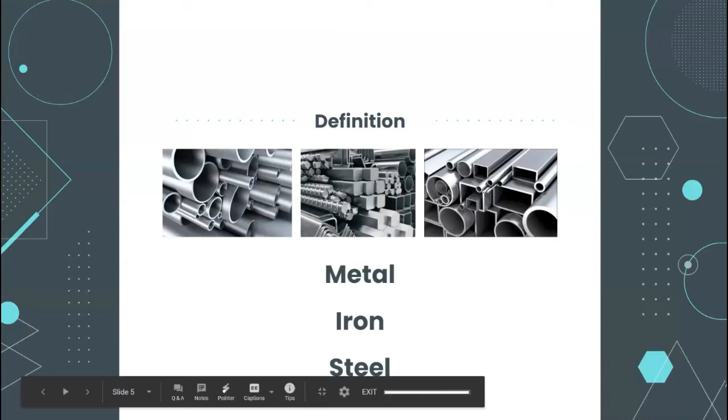First of all, introduction to metal, iron and steel. The definition of metal: any class of elementary substances such as gold, silver or copper, all of which are crystalline when solid and many

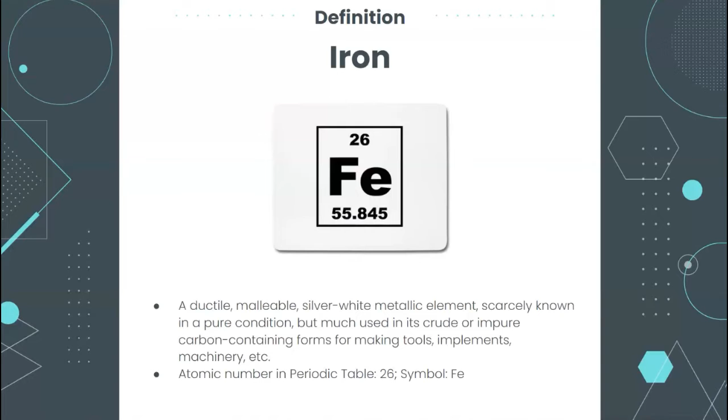of which are characterized by opacity, ductility, conductivity and a unique luster when freshly fractured. Iron is a ductile, malleable, silver-white metallic element scarcely known in a pure condition but much used in a crude or impure carbon-containing form for making tools, implements, machinery, etc. The atomic number for iron is 26 and the symbol is Fe.

The definition of steel is any of various modified forms of iron artificially produced, having a carbon content less than that of pig iron and more than wrought iron, having qualities of hardness, elasticity and strength varying according to composition and heat treatment.

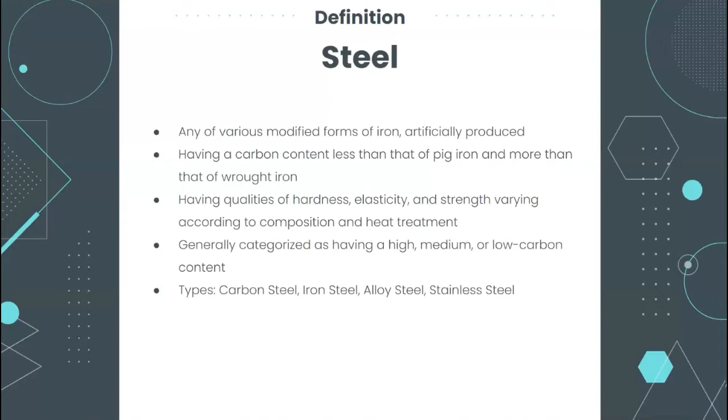There are various types of steel. First one is carbon steel. It looks grey, matte-like and is considered vulnerable to corrosion.

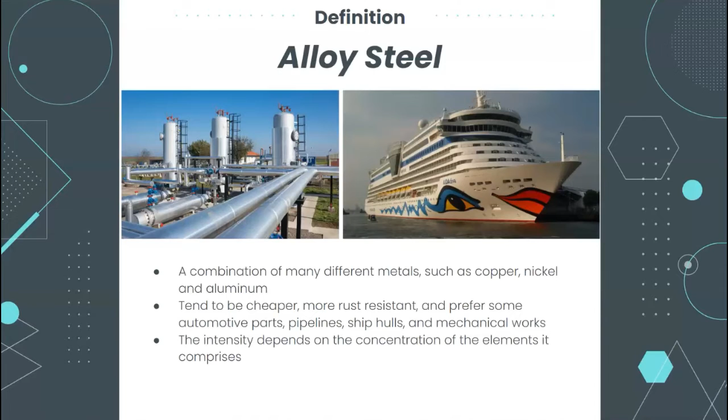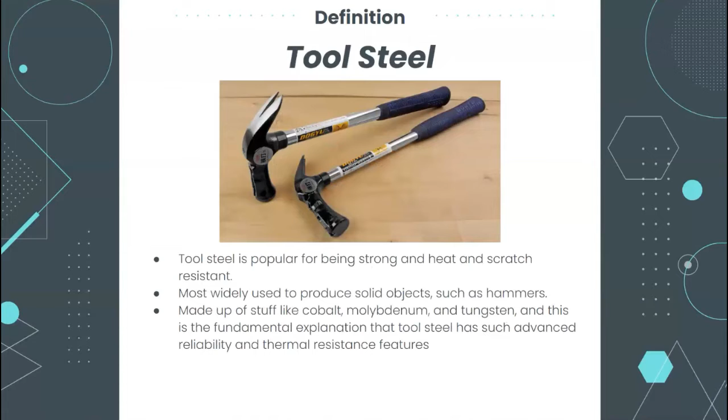Alloy steel is a combination of many different metals such as copper, nickel and aluminium. Tool steel is popular for being strong and heat and scratch resistant. It is most widely used to produce solid objects such as hammers.

Stainless steel is glossy and usually has around 10 to 20 percent chromium, which is the main alloy material. This mix allows the steel to be rust resistant and quite readily molded into different shapes.

This is the difference between steel and iron. Iron is a pure element, but steel is an alloy where iron is the main component. Iron gets oxidized easily to form rust and the shine does not last long, but steel is protected from getting rust. Thus, the shine lasts longer.

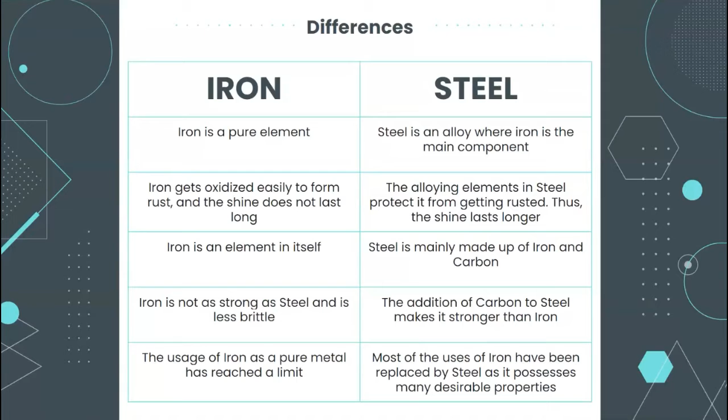Iron is an element in itself, while steel is mainly made up of iron and carbon. Iron is not as strong as steel and is less brittle, but the addition of carbon to steel makes it stronger than iron. The usage of pure iron metal has reached a limit, but most of the uses of iron have been replaced by steel as it possesses many desirable properties.

My name is Maisarah and I will be talking about Ironmongery. Ironmongery is a mass production of goods made from iron, and ironmongery work is quite similar to the jobs of blacksmiths.

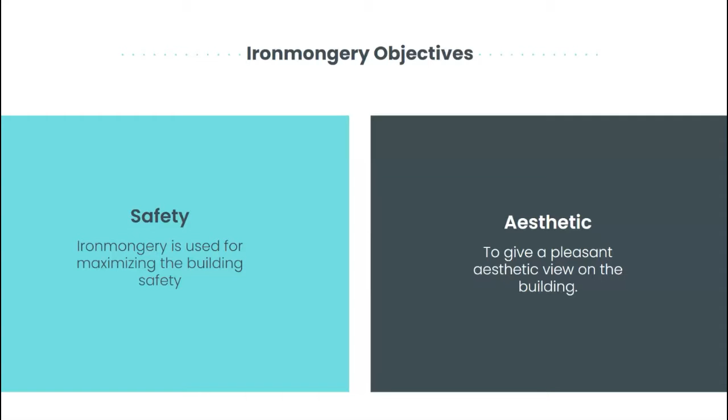Ironmongery is important and is used for the safety of the building and also for aesthetics, to give a pleasant view for the building. This is the type of ironmongery found at the door, both external and internal doors. The main ironmongery of the door is the lock set, hinge and door handles.

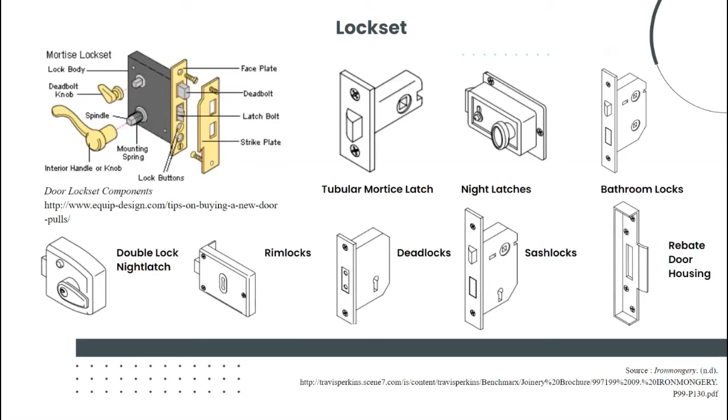Next one is the night latch. It is used for multi-residential buildings and does not require key access. Others include the double lock night latch, rim locks, deadlocks, sash lock, and rebate doors.

The next topic is the type of door handles that have different purposes for different rooms. Latch handles are commonly used for internal use where they join with the tubular mortise latch, and for bathrooms where the outside face can be unlocked for safety, and for locks which have pre-cut holes.

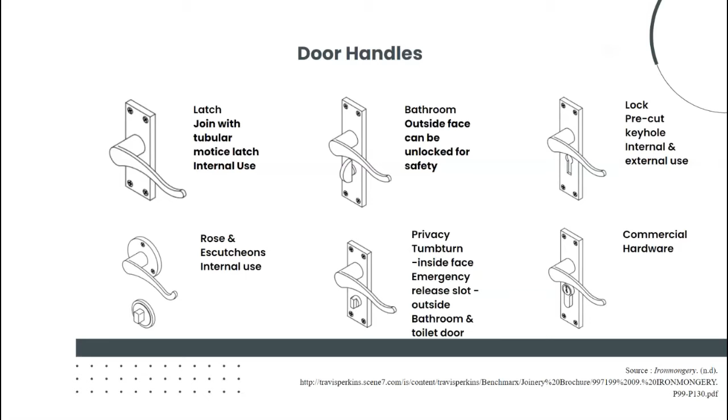Next is the rose and escutcheons for internal use. Then the privacy door handle, which has an emergency release slot used for bathrooms and toilets. Lastly, there are commercial hardware door handles.

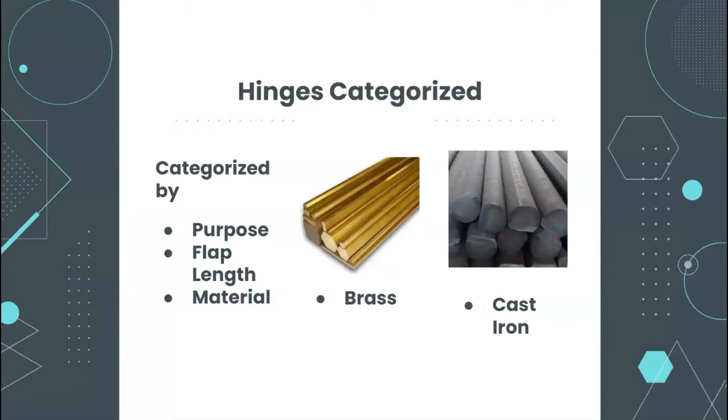Next, we go on with the hinge, which helps the door to open and close. Hinges attach the door, pivoting at one edge. The hinge is categorized by purpose, flap length, and materials. These are the types of materials commonly used for hinges, which are brass and cast iron.

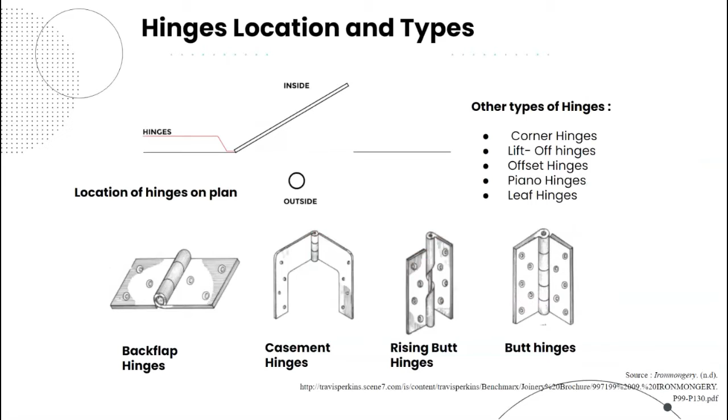This slide shows the location of the hinge and the common hinges that are used, such as the back flap hinge, casement hinge, rising butt hinge, and butt hinge.

So next, my friend will be explaining about Metalworks on the next slide.

Metalworks is actually widely used in the building and construction sector because of their intrinsic properties. Metals are solid materials that are hard, shiny, malleable, fusible, ductile, and have good electrical and thermal conductivity in general.

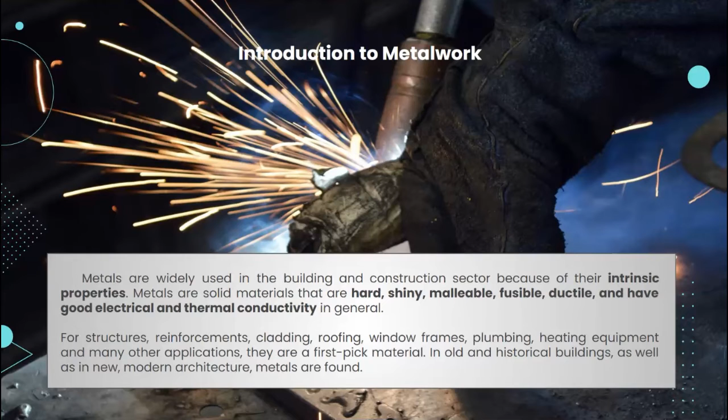There are two types of metalwork: ferrous metal and non-ferrous metal. Ferrous metal's base metal is iron, which generally makes them susceptible to rust when exposed to humidity. Alloy steel, carbon steel, cast iron, and wrought iron are some common ferrous metals.

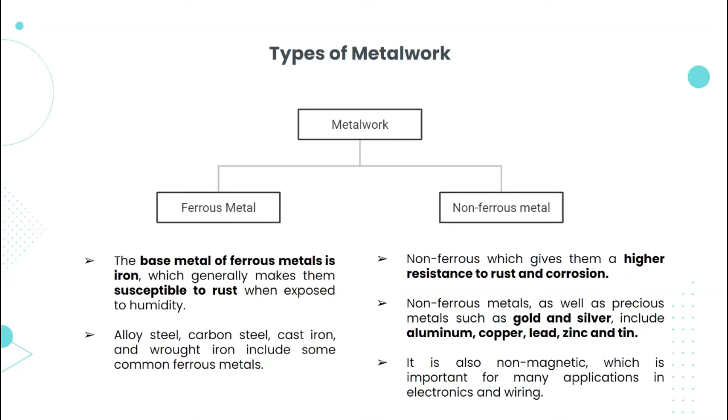Non-ferrous metals have a higher resistance to rust and corrosion, as well as precious metals such as gold and silver, including aluminum, copper, lead, zinc, and tin. They are also non-magnetic, which is important for many applications in electronics and wiring.

For stainless steel, it has a high content of chromium that forms an invisible layer on the steel surface to prevent it from staining. When stainless steel is prepared with the addition of chromium, nickel, nitrogen, and molybdenum, it becomes corrosion resistant.

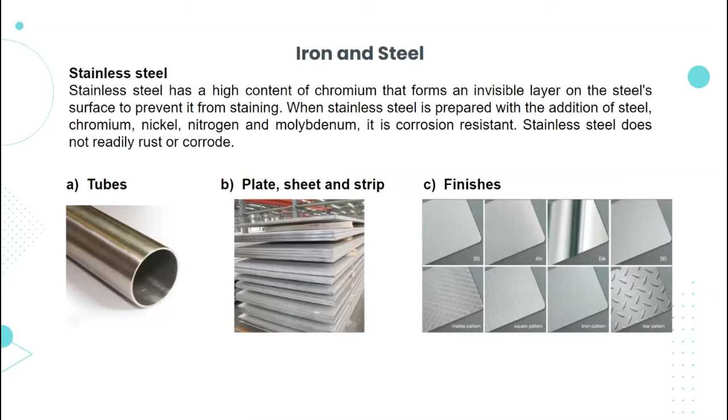Stainless steel does not readily rust or corrode. These are examples of stainless steel.

For galvanizing, steel requires a zinc coating to be applied. It also requires the steel to go through a series of other processes to ensure that without any foreign bodies getting in the way, the zinc will completely adhere to the iron in the steel. The zinc then fuses into the steel and creates a durable coating that does not peel or flake, making it possible to convert the finished galvanized steel into a product completely protected from corrosion.

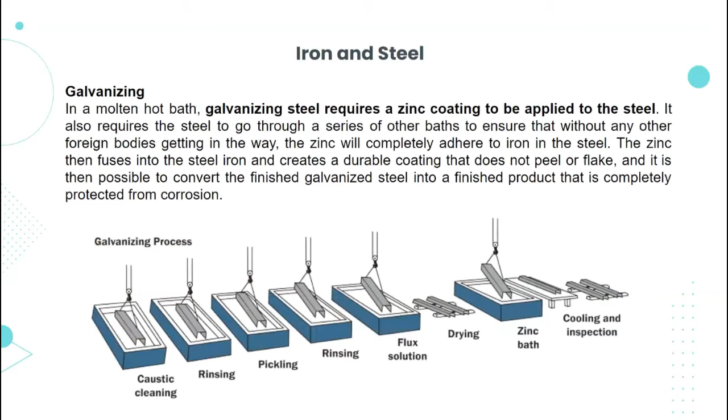So basically, these are the galvanizing process steps. As for sherardizing, the process involves heating the steel up to a very high temperature. It is then placed in a rotating drum that also contains zinc dust and possibly some other sand filler. The steel is then rolled at a high temperature in a drum full of zinc, where the zinc will evaporate and diffuse, bonding to the steel and filling in very small crevices.

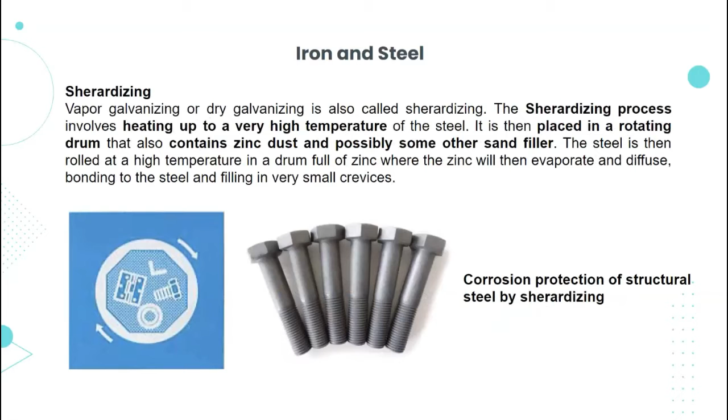As for chromium plating, chromium plating is a method of applying a thin layer of chromium through an electroplating procedure to a substrate.

There are two types of metal fasteners: those that produce a permanent bond and those that require either a releasable or a sliding bond. Examples in the first category include screws, nuts and bolts, rivets, retaining rings, and clamps. Non-permanent fasteners include quick-release couplers and clamps designed to be removed at a specified time, and pins allowing the relative movement of the fastened parts.

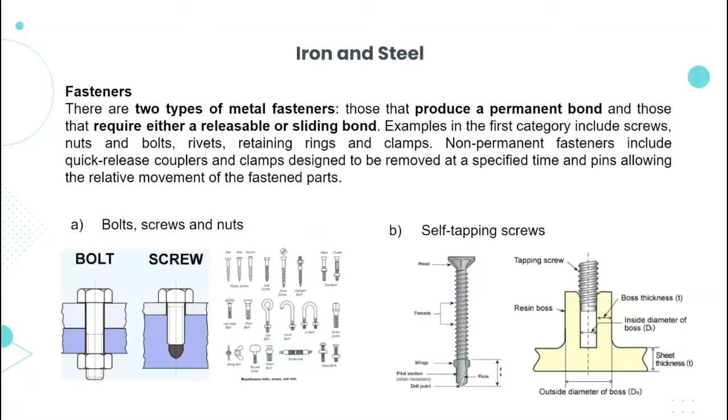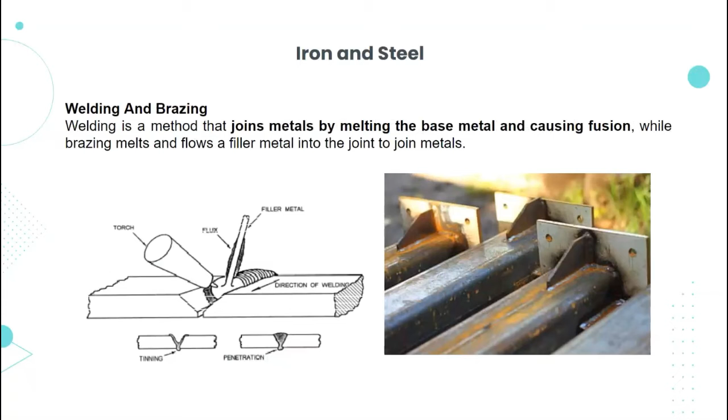Welding and brazing: welding is a method that joins metals by melting the base metal and causing fusion, while brazing flows a filler metal into the joint to join metals.

For aluminum works, after steel, aluminum is the second most used metal in buildings. Aluminum can be formed into many shapes and profiles due to its ductility. For exterior construction, aluminum wall cladding systems are commonly used, with large wall panels requiring fewer joints, resulting in time-efficient installation. Some common applications for aluminum are long-span roof systems, unstable places such as towers for electrical transmission, corrosive or humid environments, and structures to which maintenance access is restricted, such as mast lighting towers and antenna towers.

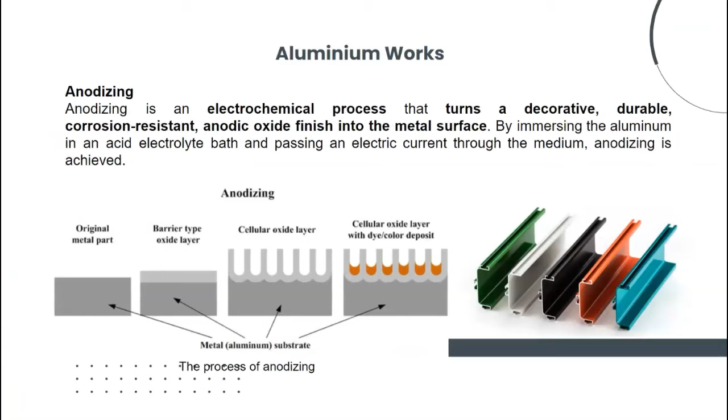Anodizing is an electrochemical process that turns a decorative, durable, corrosion-resistant anodic oxide finish into the metal surface. By immersing the aluminum in an acid electrolyte bath and passing an electric current through the medium, anodizing is achieved.

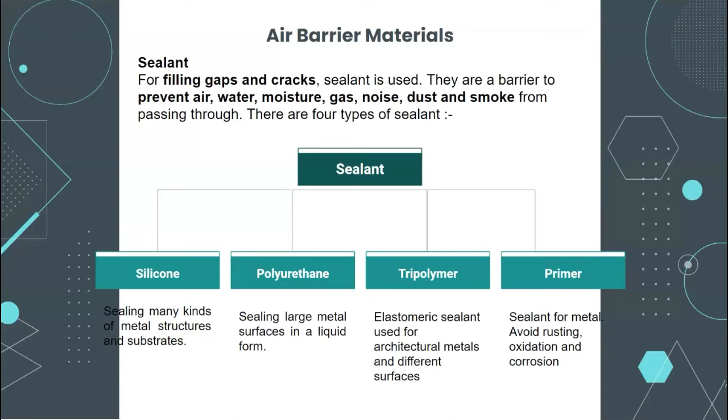As for the sealant, it is used for filling gaps and cracks. They are applied to prevent air, water, moisture, gas, noise, dust, and smoke from passing through. There are 4 types of sealant: silicone, polyurethane, tripolymer, and primer.

Weather stripping is used to block air leakage around doors and the operable parts of windows. Some types of weather stripping are closed cell foam, rib, tubular, spring vinyl, spring metal, magnetic strip, door sweep, full threshold, and spring loaded.

My name is Mohamad Safwan and I will be explaining about structural steelwork.

So what is structural steelwork? Structural steelwork is generally used to form a skeleton frame of a building or other built asset, typically consisting of columns and beams which are riveted, bolted or welded together.

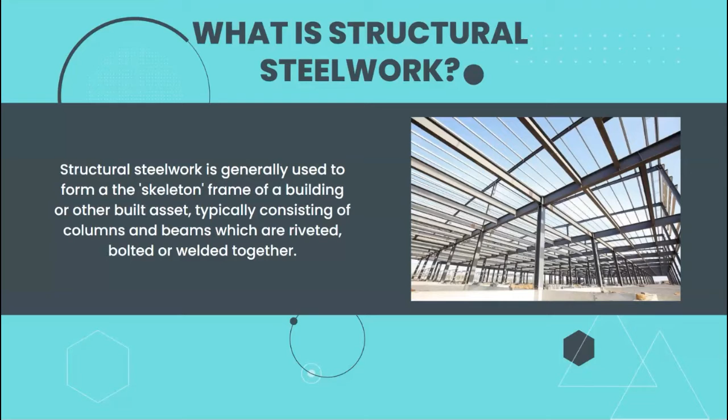The next one is the material of structural steelwork, which is shaped into several sections: I section, also known as a universal beam, H section, universal column, circular hollow section, rectangular hollow section, and many other shapes.

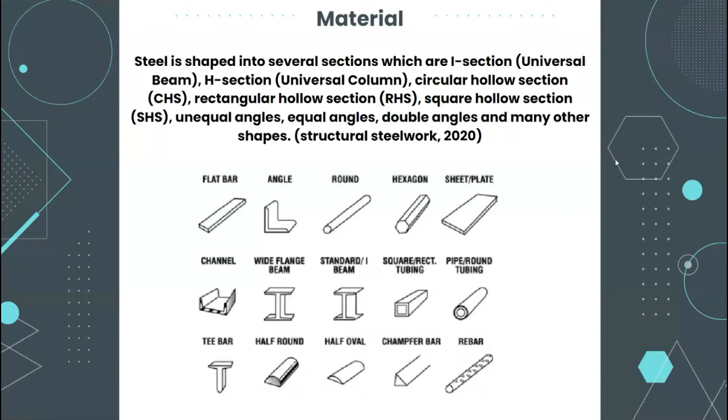They have two types of standard section: hot roll steel and cold roll steel. Hot roll steel is formed by moving the heated steel between white rollers, which deform it into an appropriate shape such as H, I, W, S, C, angle, cylinder, and so on. For the cold roll steel, it is pressed at a slightly cooler temperature, even at room temperature, which ensures that it does not shrink or change shape.

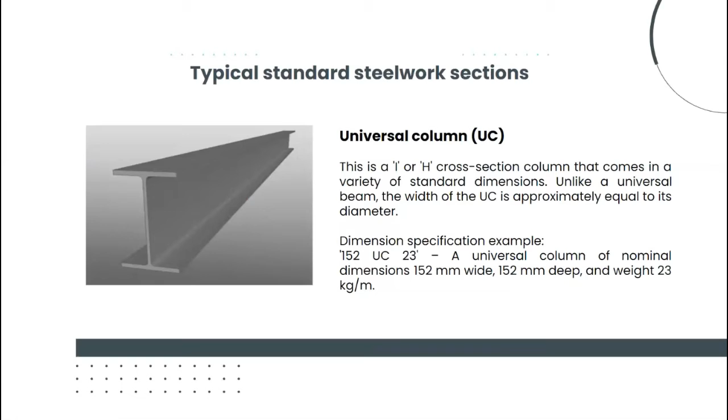So the next one is the typical standard steelwork sections. The first one is a universal column, which is an I or H cross-section column that comes in a variety of standard dimensions. The next one is a universal beam.

Flat section, where a connection between two beams is needed. Flat section can be used when welded along the beam top or bottom length. They may add tremendous power.

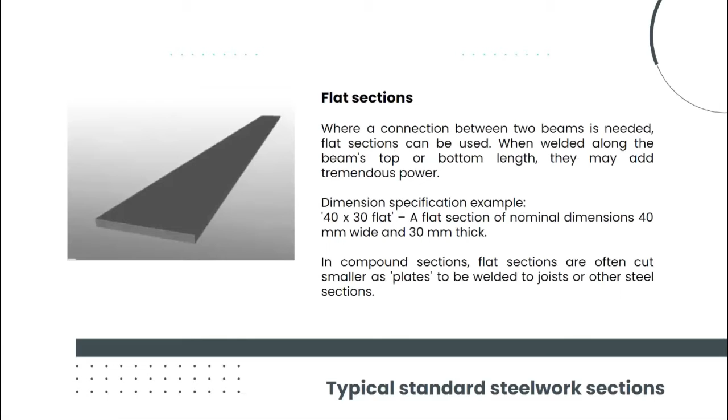So the next one is the circular hollow section, also known as a CHS section. They are also used as column braces for a steel frame structure. They are marked with a diameter and thickness of the wall.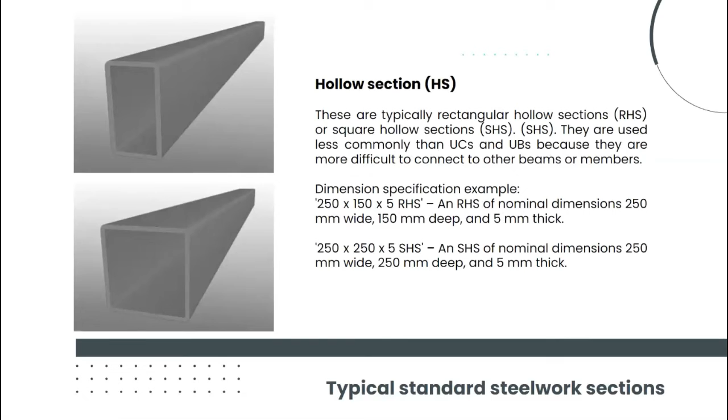The hollow section is typically a rectangular hollow section or square hollow section. They are used less commonly than UC section and UB section because they are more difficult to connect to other beams or members.

The next one is a rolled steel angle, RSA. They can be either equal angles or unequal angles, often called L-shaped sections. They have two types of angle: equal angle and unequal angle.

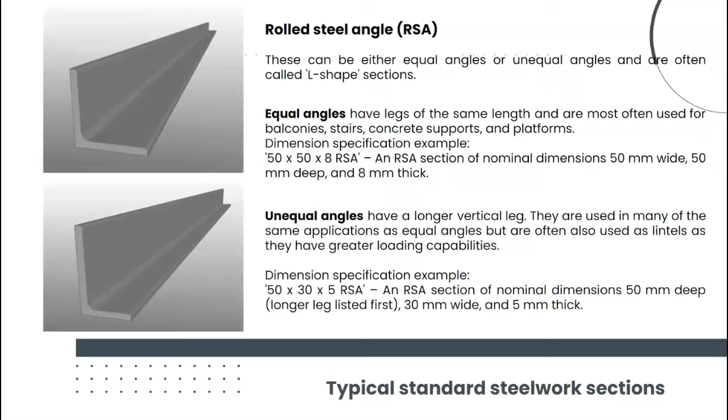This is the dimension and tolerance based on specification for structural steelwork of JKR. So all steel must be specifically inspected in accordance with the required material quality standard. The measurement and tolerance shall comply with the applicable specification as shown in table A and steel grade as shown in table B. This is a quality standard for structural steelwork JKR.

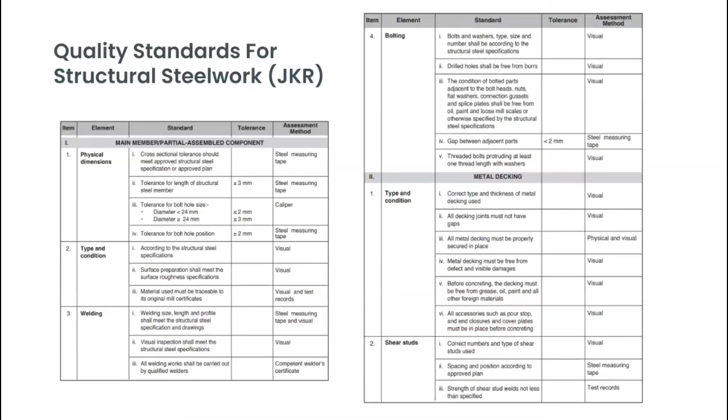So the next one is welding. It's a process where two metal parts may be connected together, through brazing and welding. The application of high temperature and often the inclusion of other metal or gases allows the metallic components of two pieces to combine and become one.

They have a range of various welding techniques: the first one is spot welding, metal inert gas, tungsten inert gas, arc welding, and gas welding.

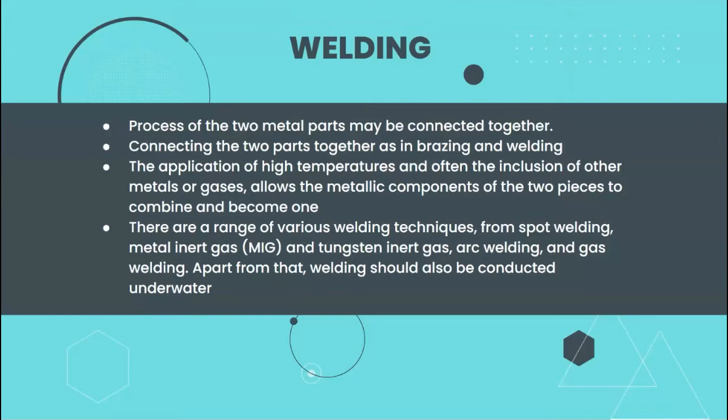So for the welding process, the first one is gas metal arc welding, which uses shielding gas around the electrode wire that heats up the metal to be connected together. The next process is tungsten arc gas welding, used for welding thick sections of stainless steel or non-ferrous metal. The shielded arc metal welding is a stick process requiring power current to create an arc between the stick. The last one is flux cored arc welding, which is a semi-automatic arc welding.

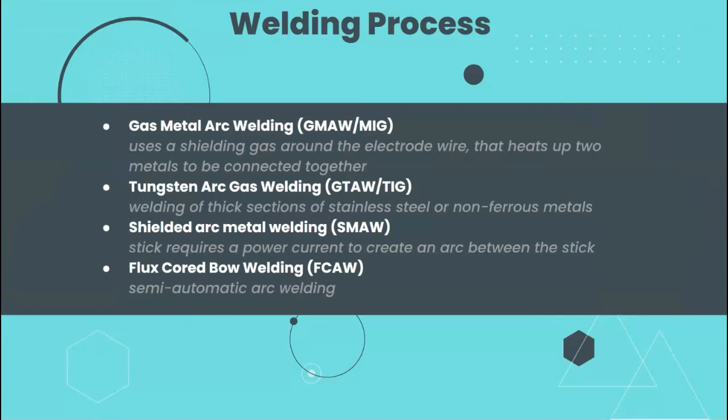The next one is bolting. The word bolt is typically used for a fastener that has only part of its shaft threaded. A fastener with its whole shaft threaded is typically called a screw. The unthreaded part of the shaft of the bolt is called the shank.

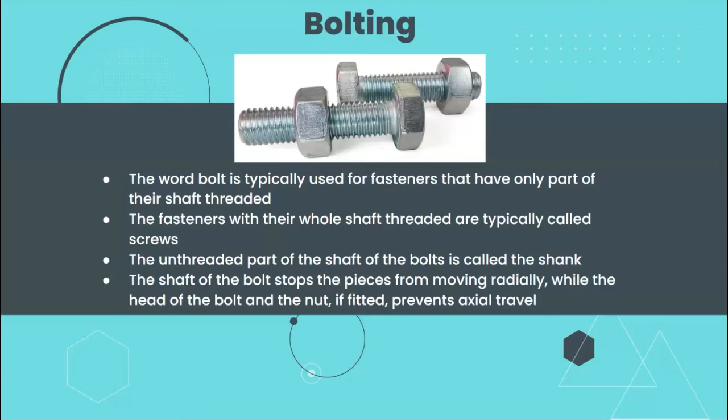The shaft of the bolt stops the pieces from moving radially, while the head of the bolt and nut, if fitted, prevent axial travel.

The combination of bolt and nut shall be not less than the following: 4.6 bolt with grade 4 nuts, 8.8 bolt with grade 8 nuts, and 10.9 bolt with grade 12 nut. Based on this, all bolt assemblies that are seized as tightened shall be replaced.

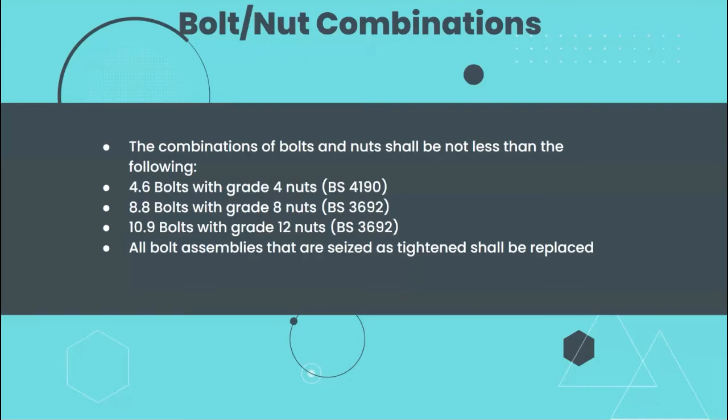The length of the bolt shall be selected such that after tightening, at least one thread plus the thread run-out should be noticeable between the nut and the threaded part of the bolt, and at least one clear thread should be evident above the nut.

Washer: when the members are attached to a finished surface treatment which may be affected by a spinning nut or bolt head, the washer should be positioned under the rotating portion.

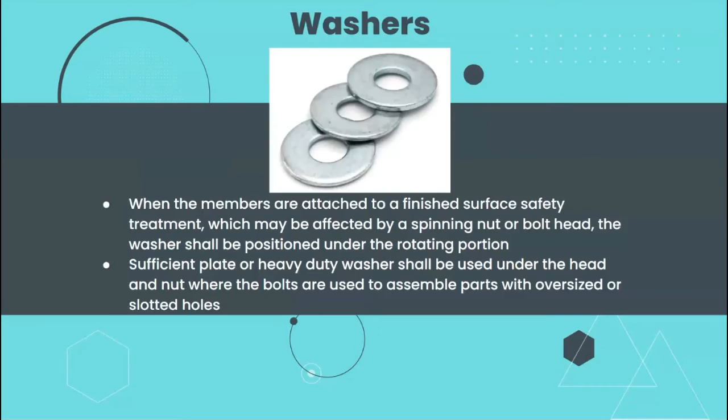Galvanized nut: nuts should be tested after they have been galvanized, for free running on the bolt, and retapped as necessary to ensure adequate tightening performance.

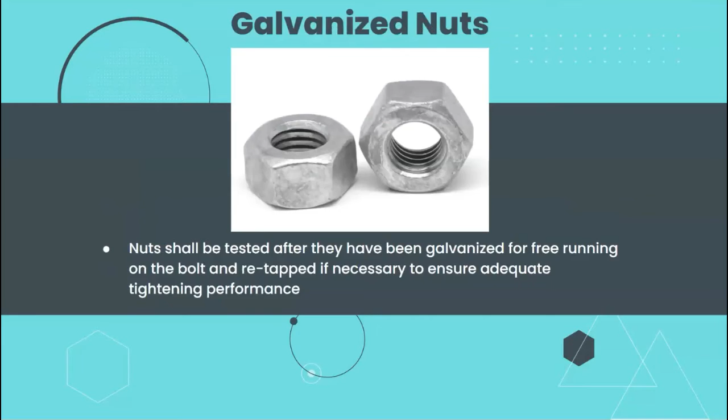For the fitted bolt, a precision bolt to BS 3692 is used as a fitting bolt where the holes are reamed after assembly so that the hole clearance is no more than 0.3 millimeters.

Accuracy of fabrication: all the steelwork needs to be manufactured to an accuracy to allow erection to take place without adding permanent erection stresses into the structure, according to the unique tolerances. The structural fabrication can be carried out in shops or at the construction site.

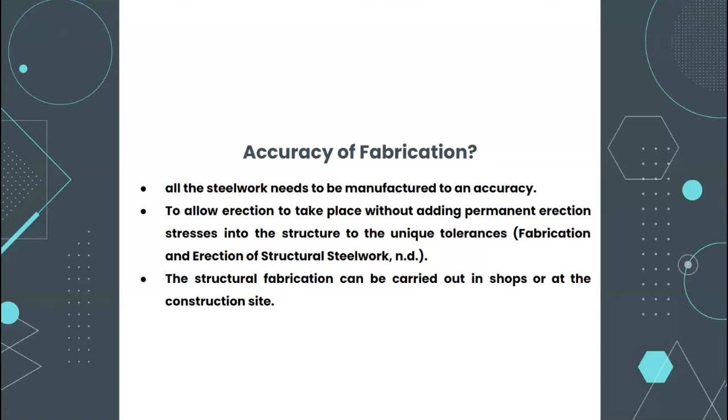These are the procedures of fabrication. The first one is surface cleaning. There are three ways to clean: hand preparation, blast cleaning, and flame cleaning.

The second one is cutting and machining, which starts with cropping or shearing using hydraulic shears. Sections can be cut to length or width.

The third one is punching and drilling, forming holes for structural steelwork connections by using numerically controlled tools to simultaneously drill holes.

The fourth one is straightening, bending, and rolling. Due to the cooling process, the laminated steel may get distorted. Therefore, this method is applied using rolls or gag presses.

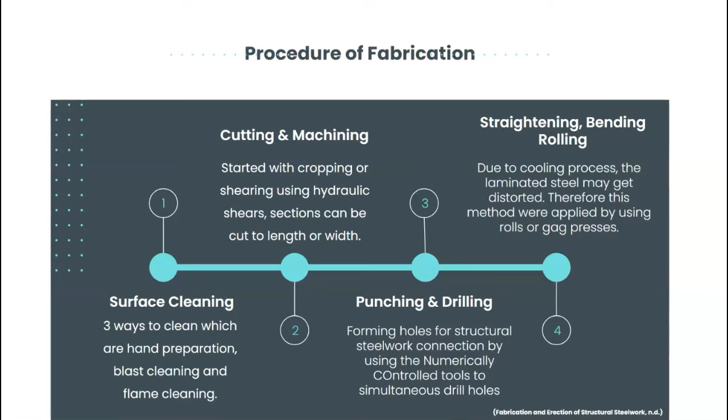The fifth is fitting and trimming. The components will be temporarily fitted with rivets, bolts, or a small number of welds before assembly.

The sixth one is fastening. The strength of the entire structure depends on the method of fastening. Welding is the common method used today by manufacturers.

The seventh one is surface finishing using sawing, milling, or other appropriate means. The last one is surface treatment by applying metal coating or painting to protect the steelwork from corrosion.

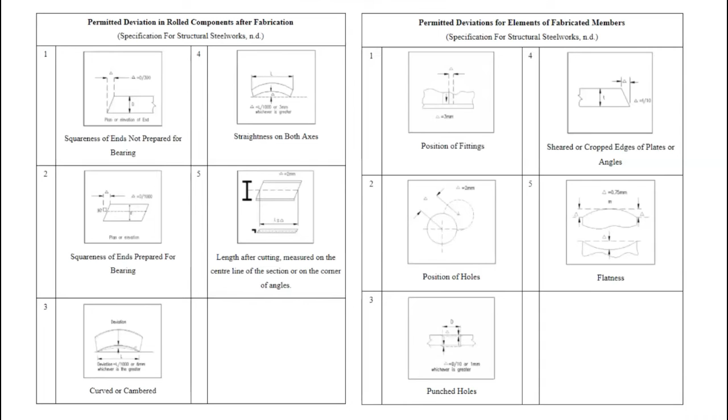These are examples of permitted deviation in rolled components after fabrication, contained in the specification for structural steelwork.

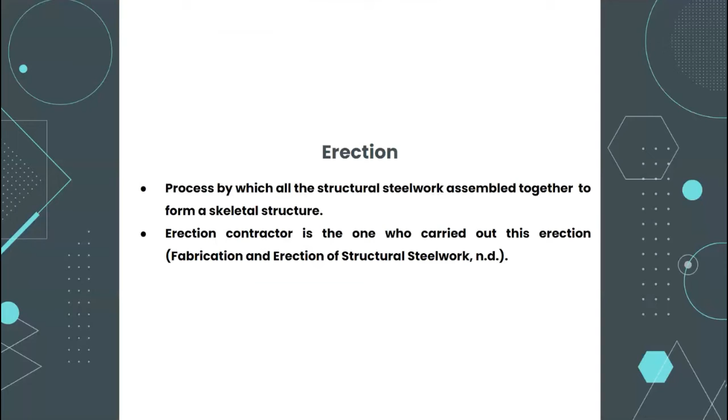The next one is erection, the process by which all the structural steelwork is assembled together to form a skeletal structure. The erection contractor is the one who carries out this erection.

These are the sequence of activities during erection.

Stage 1 is receiving or temporarily stacking products from the shop. Stage 2 is lifting and positioning the member and holding it temporarily in place.

Stage 3 is bracing the system temporarily to ensure stability during erection. Stage 4 is aligning and permanently connecting the members using bolting or welding.

Stage 5 is connection and cladding with the structural skeleton of steel. The last one is final coating and painting.

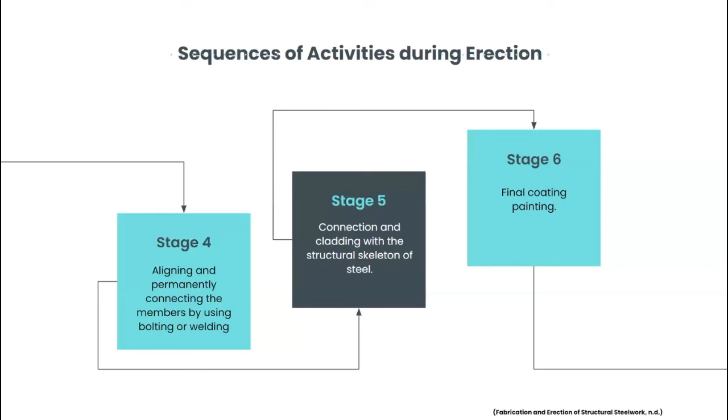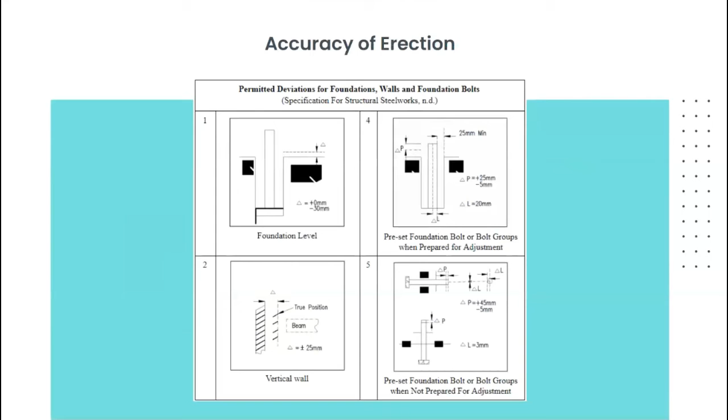These are examples of permitted deviation for foundation walls and foundation bolts under the accuracy of erection.

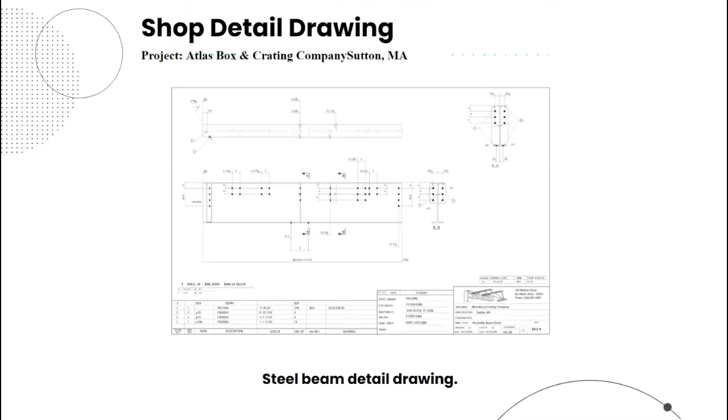Okay, I am going to take over on the performances and tests of steel.

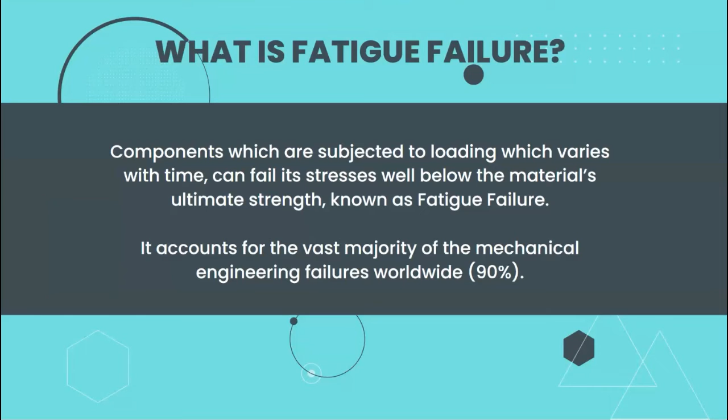What is fatigue failure? Components subjected to loading that varies with time can fail at stresses well below the material's ultimate strength. This is known as fatigue failure. It accounts for the vast majority of mechanical engineering failures worldwide, up to 90%.

Why does fatigue failure occur? Due to the formation and propagation of cracks, it is a three-stage process. Stage one is crack formation, stage two is crack growth, and stage three is fracture.

Based on the standard specification of building works, the contractor shall carry out an examination or test on the materials and its workmanship upon fabricating. As a safety measure, contractors are to conduct tests on the steel as follows.

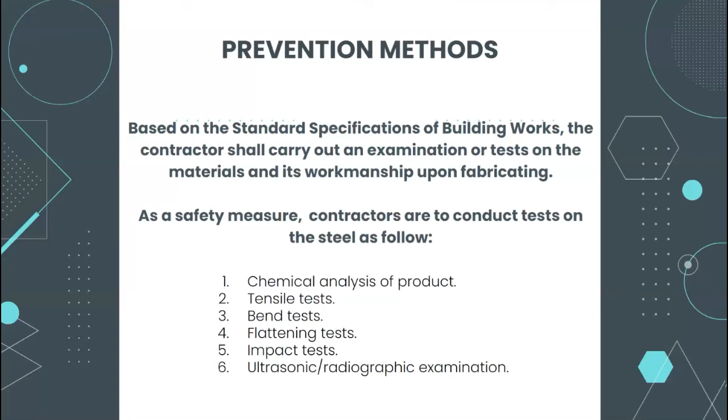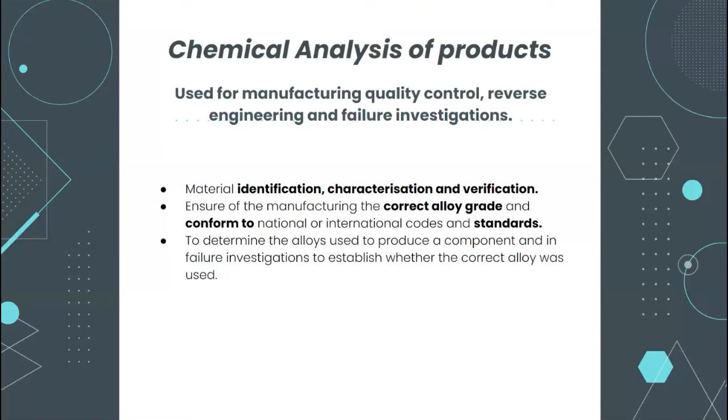The first one is the chemical analysis of products. They use this for manufacturing quality control, reverse engineering, and failure investigations. It allows material identification, characterization, and verification, to ensure the manufacturing uses the correct alloy grade and conforms to national or international standards.

The second one is the tensile test. It is performed on mild steel or high steel to determine properties like ultimate strength and percentage elongation. In this test, a steel rod is subjected to a tension load by means of a universal testing machine, or UTM, with a constant tension load, and the extension caused in the steel rod is noted against the load within the elastic limit.

The third one is the bend test. There are two types. The first is the rotating bending testing machine, identified as a rotating bending stress control fatigue data curve. This creates a failure on the specimen where a constant stationary force is applied, creating a constant bending moment.

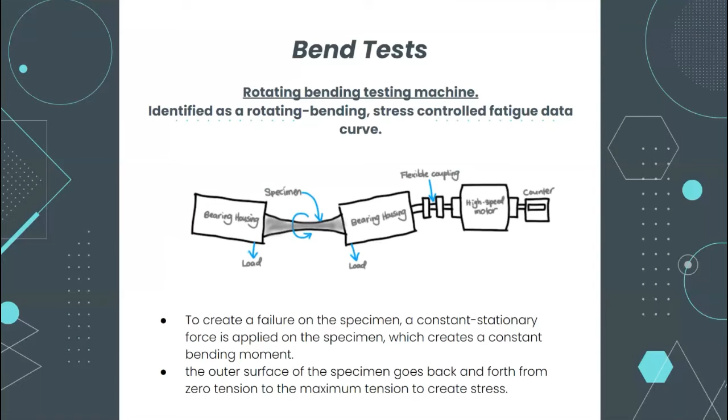Then there is the reciprocating bending test machine, identified as a tension compression strain control fatigue data curve.

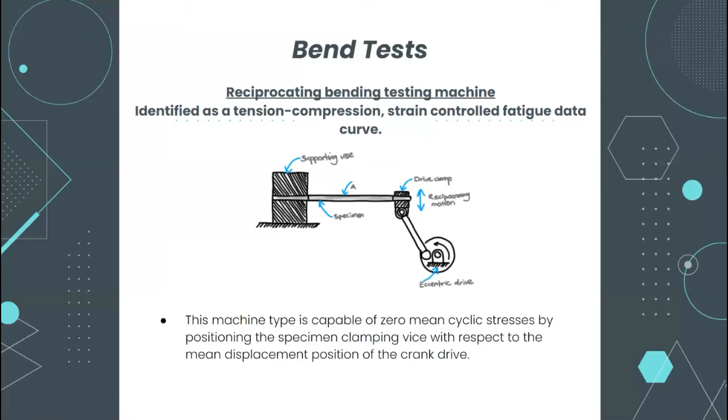And then there is the flattening test. This one uses tubular products and is conducted by subjecting rings from the tube or pipe to a prescribed degree of flattening between two parallel plates. The flattening severity is measured from the distance between the two platens.

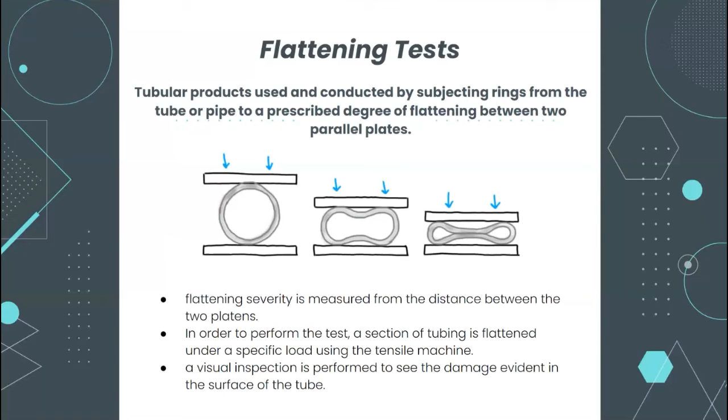And then the last one is the ultrasonic or radiographic exam. This is a non-destructive inspection method that permits high-frequency sound waves to be passed through the workpiece material. It is carried out at a frequency of 0.4 to 20 megahertz, beyond the human hearing range, and the sound waves emitted through the boundary of the workpiece reveal any cracks inside.

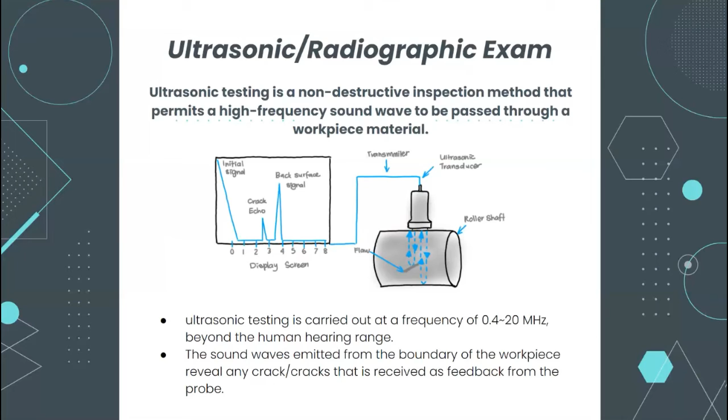For weld tests, based on the standard specifications, the contractor shall be required to conduct a non-destructive examination of welds in the presence of an engineer. The two are the radiographic and ultrasonic examination.

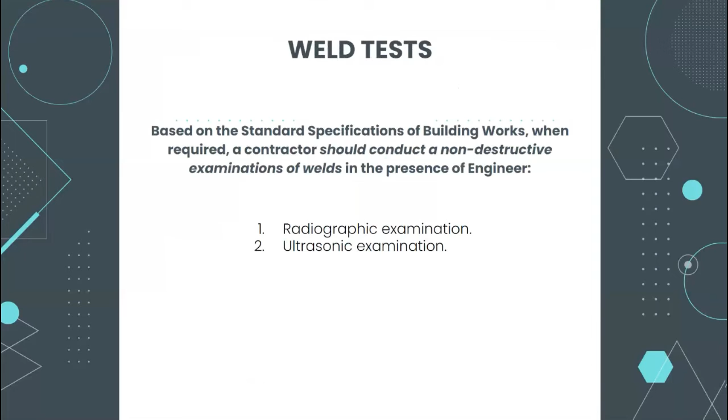In the event of requiring the weld test, the contractor must allow two specimens to be made from the materials that will be used in the structural steel work. The first is a 200 by 50 mm steel plate with one butt welded joint, and the second is a 600 mm long, 12 mm fillet weld.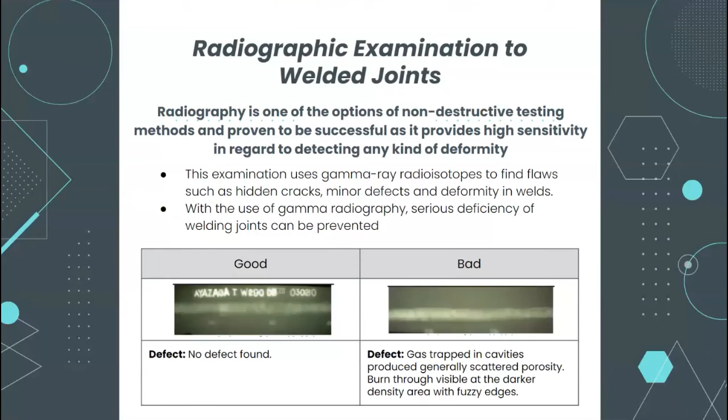And then the ultrasonic examination of welded joints, known as ultrasonic testing (UT). It features the best ability to exactly pinpoint discontinuity in a weld. This testing procedure requires a high level of skill with proper training, and is capable of detecting finer lines or minor defects which might not be as visible through radiographic testing.

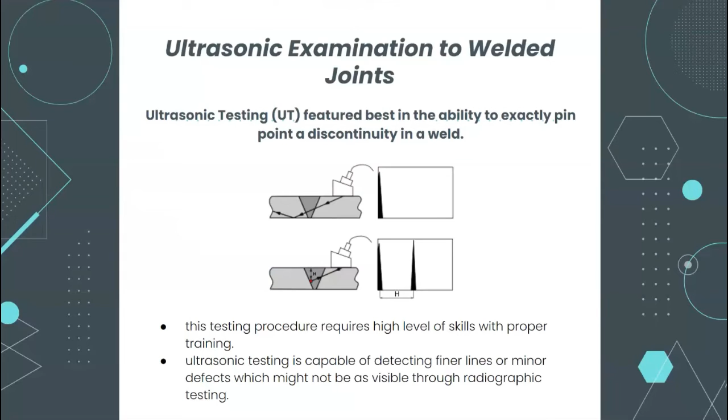Okay, so next is the interview and review. On Sunday, 27 December, we interviewed Tuan IR Muhammad Afandi bin Konting, an engineer from Pontian Johor, to ask questions and opinions on metalwork and steelwork construction. The interview was conducted via an online platform using WebEx.

Firstly, the background information. The name is IR Muhammad Afandi bin Konting. He's 40 years old and he's involved in the construction industry since 2003 as a contractor and engineering consultant. He is currently a consultant and local representative for an EPC contractor from mainland China for an oil and gas project in Tanjung bin Kukup, Pontian Johor.

The second question is the code, regulation and standard specification needed to be followed by an engineer in steelwork construction. For the structural steel, EN 1993 Euro Code 3 is required when designing a steel structured building. Also BS EN 1090 for structural steel and aluminium, which is a harmonized standard that covers structural or construction steel and aluminium products that are installed in a permanent manner.

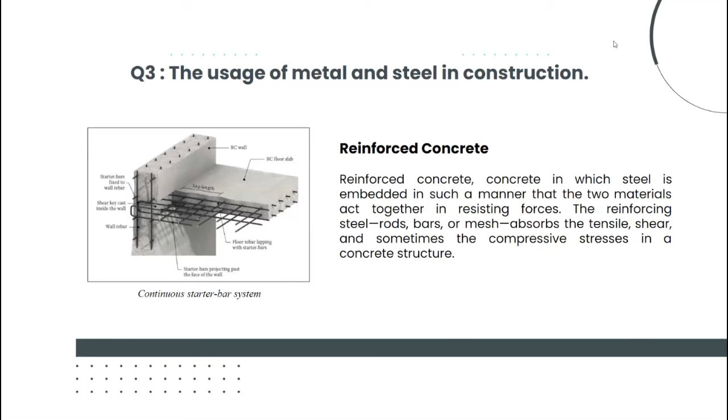The third question is the usage of metal and steel construction. Firstly is reinforced concrete. Metal is used in reinforced concrete in which steel is embedded in such a manner that the two materials act together in resisting forces. The reinforcing steel rods, bars or mesh absorb the tensile, shear and sometimes the compressive stresses in a concrete structure.

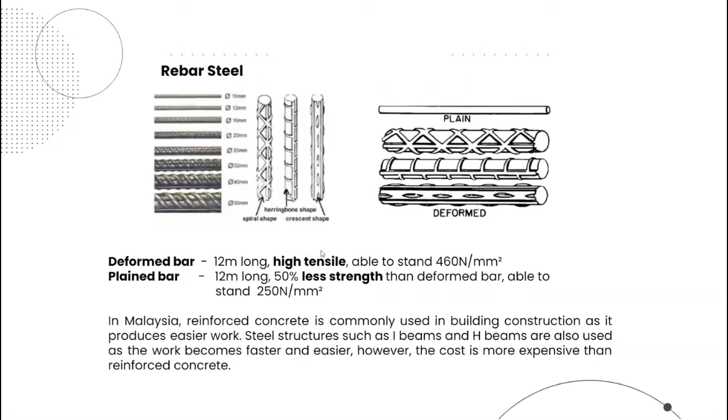Next is rebar steel. There are two types of rebar steel: deformed bar and plain bar. The deformed bar has a high tensile strength and is better than the plain bar. This is mild steel, which is the most commonly used form of steel, and it has low price and huge versatility.

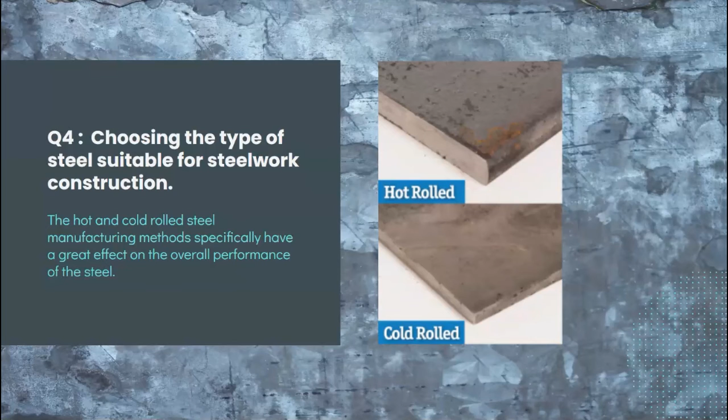The next question is choosing the type of steel suitable for steelwork construction. Basically there are two types: hot roll and cold roll. Hot roll steel is rolled at a temperature above recrystallization temperature, which exceeds 1000 Fahrenheit. It has a scaly surface finish which can be removed by several techniques such as pickling, grinding, or sandblasting.

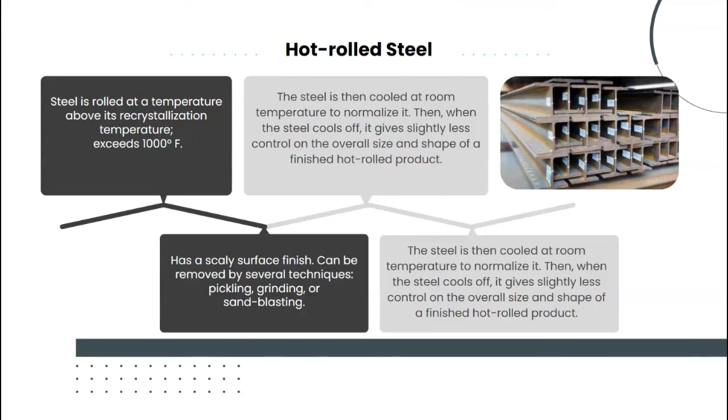The steel is then cooled at room temperature to normalize it. When the steel cools off, it gives slightly less control on the overall size and shape of the finished hot roll product. Now for cold roll steel.

Cold roll steel is a process that refers to steel that is pressed with pressure of a roller at room temperature, and it has a 20% increase in strength compared to hot roll steel. The exterior finish of cold roll steel is very desirable and has aesthetic value. However, the application of cold roll steel is limited to a couple of shapes, which include strips, bars, rods, home appliances, and others.

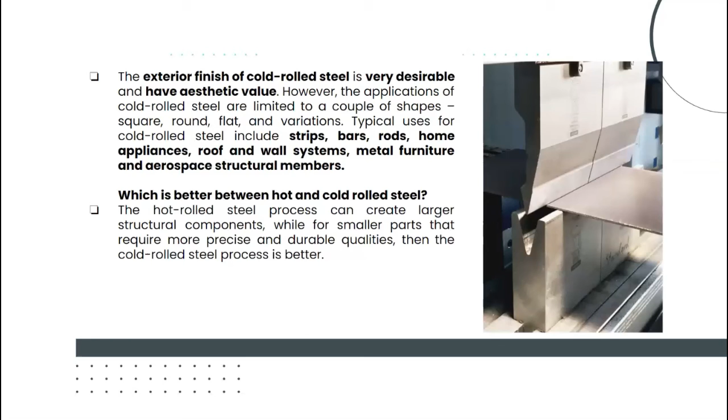So which is better between hot roll and cold roll steel? The hot roll steel process can create larger structural components, while for smaller parts that require more precise and durable qualities, the cold roll steel process is better.

These are some of the engineering software used by engineers to check the strength and suitability of steel structures designed by architects. They use software such as TEDDS Pro and Esteem software. The engineer will then advise the architect on the suitable sizing of the steel structure based on the calculation from the software.

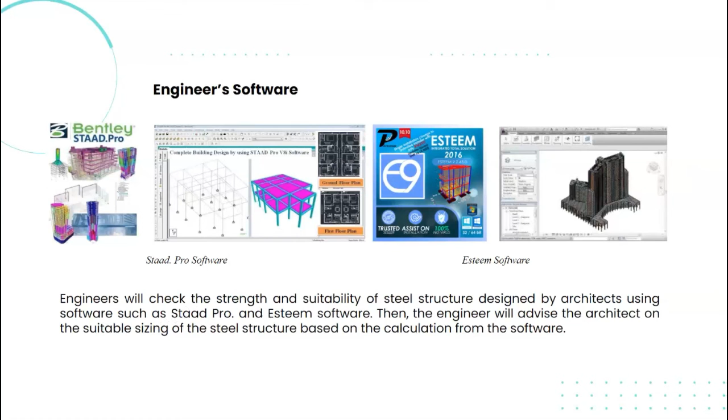The next question is the issues faced by engineers during steelwork construction and steps taken to overcome the problem. According to the engineer, some of the issues faced include different sizing of steel proposed by architects in design compared with the standard size of fabricated steel. Hence, architects are advised to design according to the standard steel sizes provided in the BS schedule.

So, benefits of using metal and steel in construction. Firstly, it increases the speed of building construction and installation.

Secondly, the steel structures have better strength and durability. Thirdly, the condition of the site becomes cleaner compared to working with timber and cement. However, proper detailing and sizing should be produced by the fabricator to ensure accurate installation on site.

So the future prospect and further development in steel construction. Steel construction is more expensive than reinforced concrete. However, with government support, it is possible to use steel structures in the future according to the engineer.

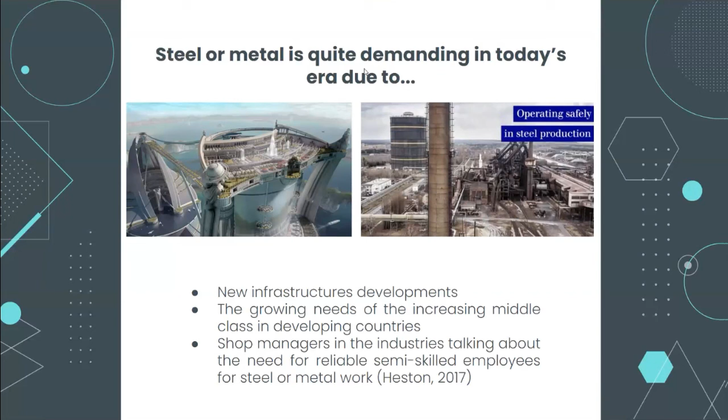Steel or metal is quite demanding in today's era due to new infrastructure developments and the growing needs of the increasing middle class in developing countries. Shop managers in the industry are talking about the need for reliable semi-skilled employees for steel or metal work.

According to the Malaysian Iron and Steel Industry Federation, it's expected the demand of steel will increase from about 1.59 billion tons in 2017 to 1.63. Another study made by Cision PR Newswire claims that the world steel industry will reach $1.3 trillion in 2025. This means that even though there will be a pandemic and whatsoever, the steel industry will increase furthermore. Though for the last few years, there's been weakening results from the oversupply of steel that has driven prices down.

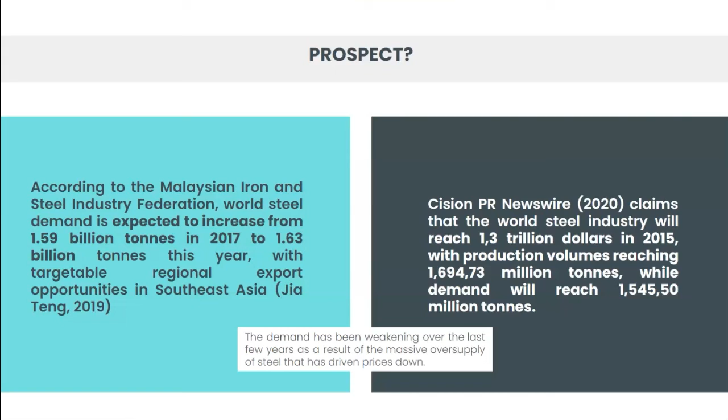So what does the future hold for the steel market and the industry? Will it be beneficial to the future generation?

So there are some new technologies that have been made in the steel industry, whereby there's multiple automated technologies, organizational paradigms, self-learning algorithms, modern modular steel frame systems, newer materials like graphene, and reduced CO2 emissions in buildings towards net zero. So these are the beneficial factors for having steel being used widely all over the countries in the world.

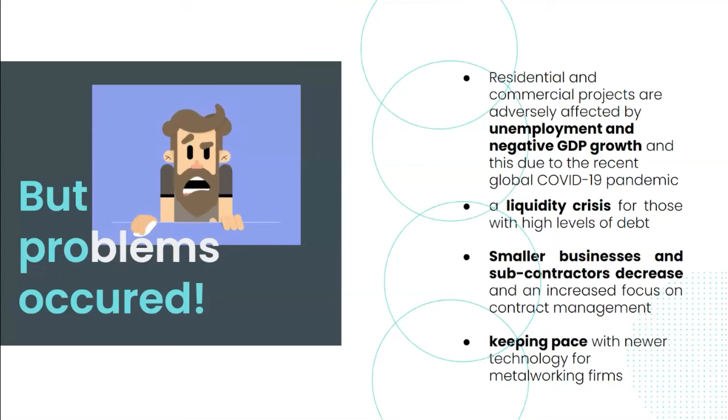And then there's also a liquidity crisis due to high levels of debt. Smaller businesses and subcontractors also decreased, and current metalworking firms are struggling to keep pace with newer technologies.

So the outcome, the overview of the prospect of future development in the steel industry is basically that global steel production grew by 5.8% in a month and 13% a year later. Even in Malaysia, as Haziqah said earlier, I think it's actually really beneficial to use steel in the industry.

However, due to the fact that reinforced concrete is way easier than steel to use, and with China being the dominant country supplying the steel industry mainly, maybe that's why the steel production grew.

So the new structural materials and systems will be smart, wired, adaptive and sustainable, and will evolve more. Manufacturing-driven technologies such as machine learning, lean manufacturing, and of course modular construction can be transformed on the construction site in an easier way. Engineering curriculum would rely on high-value problem-solving capabilities, and the sharing economy would disrupt how building facilities are planned, constructed, and run.

So new technologies would need new technology skill sets that are more manufactured. So I think that's all from us.